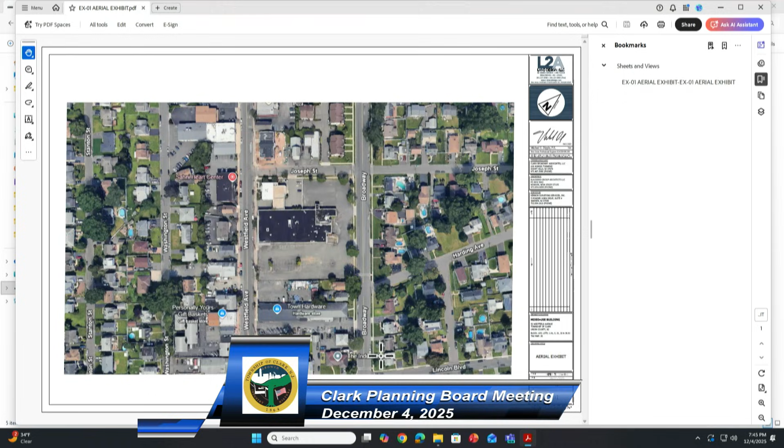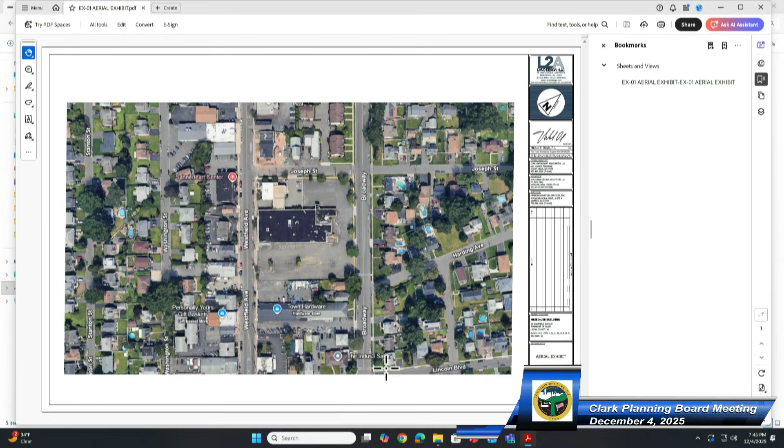To start off, I wanted to bring up a simple Google Earth aerial exhibit of the subject properties to get the board and the public familiar with the site as it exists today. This sheet shows the most current Google image, indicating the existing grocer on the central portion of the property in black, which has been vacant for nearly 20 years, surrounded by a large area of asphalt, the former parking areas. The site is accessed via Westfield Avenue to the south, Broadway to the north, and Joseph Street to the west. At the southwestern corner lies the existing bank with dual drive-through, with additional asphalt surfaces and a number of curb cuts. I wanted to familiarize the board with the site today prior to going into the plans, civil plans, and color renderings prepared for tonight's hearing.

A little additional information on the existing site: it slopes in a southerly direction, with Broadway at a higher elevation than Westfield. Stormwater runoff is not currently detained with any known stormwater management measures. Essentially, runoff from existing conditions flows off the site undetained, nearly all of it tributary to Westfield Avenue. There are 5 existing curb cuts throughout the entire property: 2 on Westfield Avenue, 1 on Joseph Street, and 2 on Broadway.

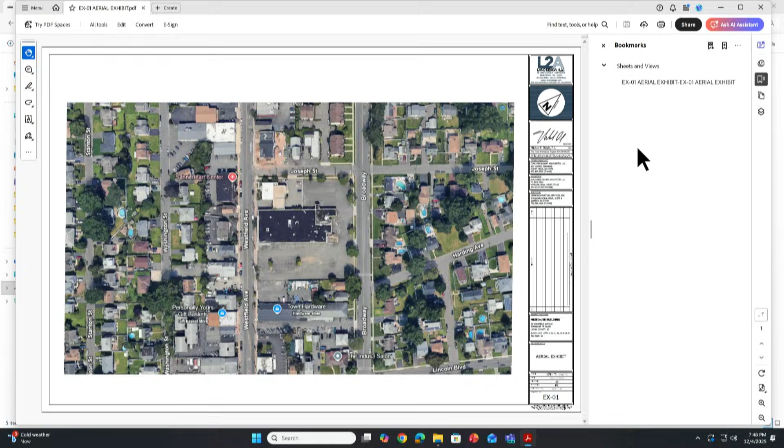I'm going to go right into the site plan that was prepared for this. We're marking this as an exhibit since it was not submitted to the board; this will be A2. Exhibit A2 is a near replica of sheet C04, the site plan submitted as part of this application. The major difference is that this plan is colorized to identify proposed improvements, including the building, grass or landscaped areas, new asphalt areas, curb cuts, and striping. There's one additional change resulting from the TRC meeting prior to this hearing, regarding curb radii. Some of the original curb radii for the driveways was 15 feet, and I changed it to a minimum of 20 feet to comply with those comments, before I forget going through the testimony of this plan.

The large brown area in the middle is the extent of the proposed building, a 3-story residential building over ground floor parking and commercial retail. The commercial retail component is at the southwest corner of the site, consisting of about 5,900 square feet. During architectural testimony we'll go over the interior workings of the building, but the ground floor parking can accommodate the required 1.7 spaces per unit. There are a total of 138 residential units on the upper 3 floors. The 236 parking spaces in the garage are accommodated through 77 tandem spaces and 82 single spaces, and we have additional testimony prepared during traffic testimony regarding parking and circulation.

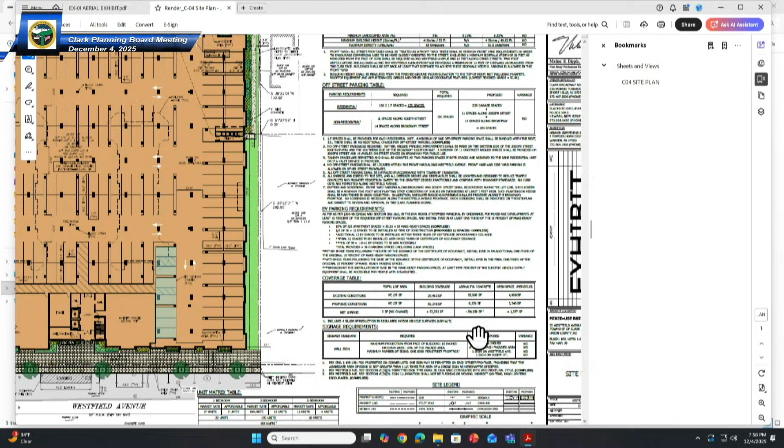So under proposed conditions, not only are we reducing the impervious coverage, the site decreases asphalt and concrete by about 54,159 square feet. It may seem like an insignificant number, but when it comes down to water quality, it's a significant improvement as compared to existing conditions.

Part of the stormwater management design was to show that the site does not increase runoff tributary to Westfield Avenue or Joseph Street, at the southwest corner of the site. It's not enough to just show that it doesn't increase stormwater. We implemented, per discussions with the engineer prior to finalizing the design, a series of stormwater detention tanks below the building. These tanks control runoff from the roof, which will be piped down the building columns into subsurface detention basins before going into the Westfield Avenue and Joseph Street municipal stormwater systems.

Why is that important? Because under current conditions, all of that runoff is uncontrolled during a large storm event, such as a 25 or 100-year storm, and those pipes are at or above capacity. So slowing the runoff underneath the building in these stormwater systems is a significant improvement, allowing runoff to leave the site slower, miss the peak, and improve the capacity of the downstream systems. That's one of the paramount design aspects, providing a significant quality and quantity improvement to the site as it currently exists.

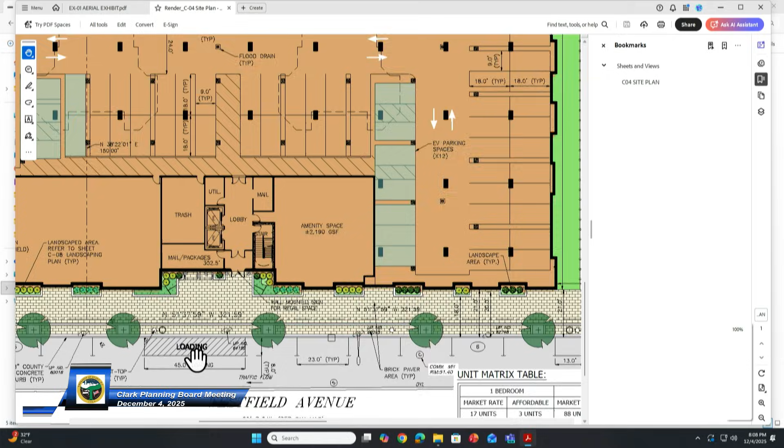Could you just show us where that loading would be? You can see the striped loading area, 45 feet long, along the frontage of Westfield. All right, thank you. Counselor, you? No, thank you, Mr. Mayor.

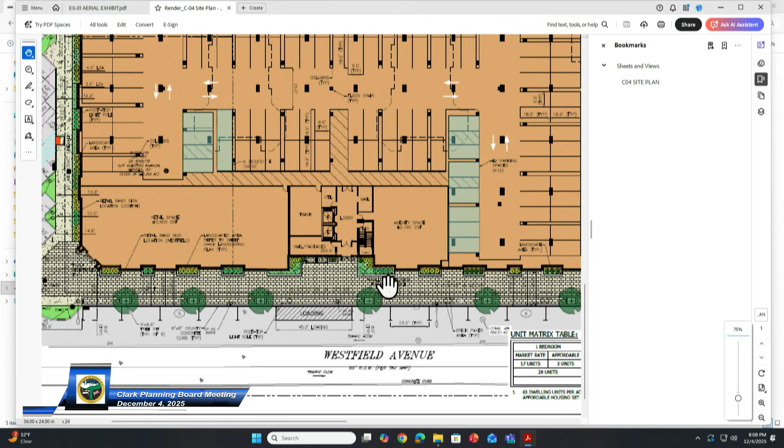Okay, hearing nobody on the board has any questions. If anyone from the public wishes to come forward regarding this testimony and this testimony only, you have a chance at the end of the meeting for general comments. Please come forward, state your name, spell it, and your address. Sure, Eric Rodriguez, 12 Bartel.

So I had a question regarding the lighting on Westfield Ave. Are the existing lights going to be retained, and are you going to add similar ones on the other sides of the property? So this question did come up. The PSE&G fixtures have actually been updated since these were installed. Even if I tried to save them, I don't think it's going to be possible. They would be replaced with the newest PSE&G fixtures and spaced between the street trees.

They would continue around the perimeter of the property to provide safe and adequate pedestrian passage throughout the site. And then the other question I had, the angled parking, is that taking over a portion of the street, or is that all on your property? The angled parking is not on our property. It's in the public right-of-way, but it does not encroach upon any existing facilities on Broadway.

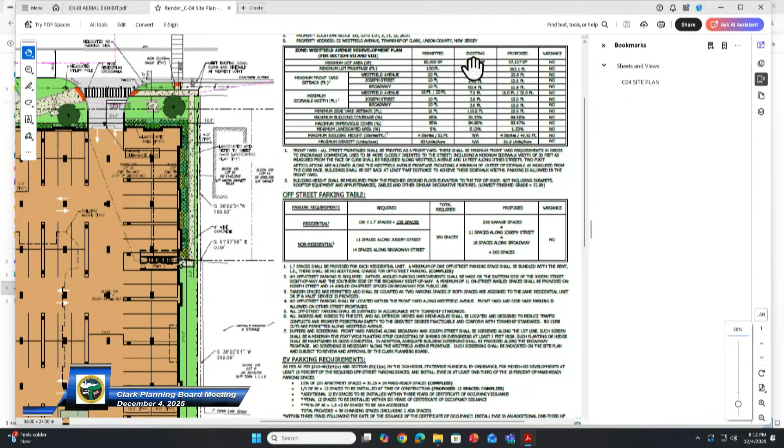So I'll zoom into the existing and proposed. The zoning table outlines the existing and proposed setbacks from Westfield, Joseph, and Broadway. Westfield existing 11.5, proposed 20.8. Joseph Street existing 24.2, proposed 12.6. Broadway existing 65.4, proposed 11.9. You can also see what the permitted redevelopment plan requirements are, so we are meeting the redevelopment plan requirements. Some may be closer, but some may be further away.

I'd also like it detailed, and you mentioned tree replacement. It looked like 9 trees. Again, how many, what's being removed, I guess, and what's the replacement of that?

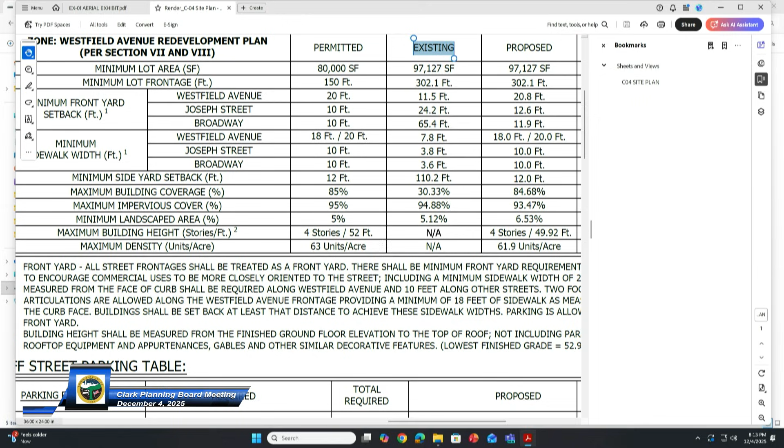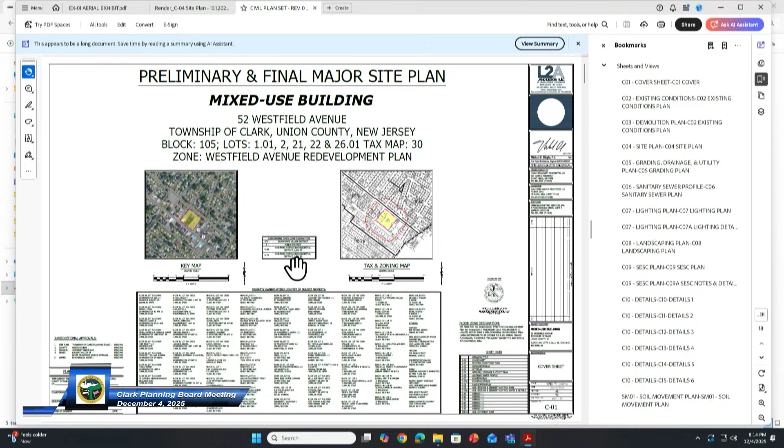We can go to the plans that were submitted as part of the application. So I'm bringing up the civil plans, do we mark the plans? You should mark it. And those are the landscaping plans?

So this is the demolition plan, and highlighted in blue X's are the existing trees being removed. A lot of the trees are actually within the public right-of-way and being replaced on site. I'll count approximately 11 trees that would be removed. As part of proposed conditions, we're proposing 19 new trees and 163 shrubs.

Hello, good evening. My name is Gabrielle Arruda. I live at 33C Parkway Drive. My question was also related to the trees.

I was wondering if the committee council might hold the business to the idea of having to supply non-invasive and native to New Jersey trees and shrubs. It's one thing to take down old growth trees and put up something inexpensive from a landscaper, as opposed to something invasive that will bring more pests to our community. So I would like to see that they're responsible for putting native trees and shrubs in, and perhaps also for the old growth trees they're taking down, perhaps you might make them plant additional trees elsewhere in Clark or within Union County. As Trevor mentioned, he talked about the trees as being aesthetic, and I think the trees are far more than aesthetic in our community, and we're losing a lot of them.

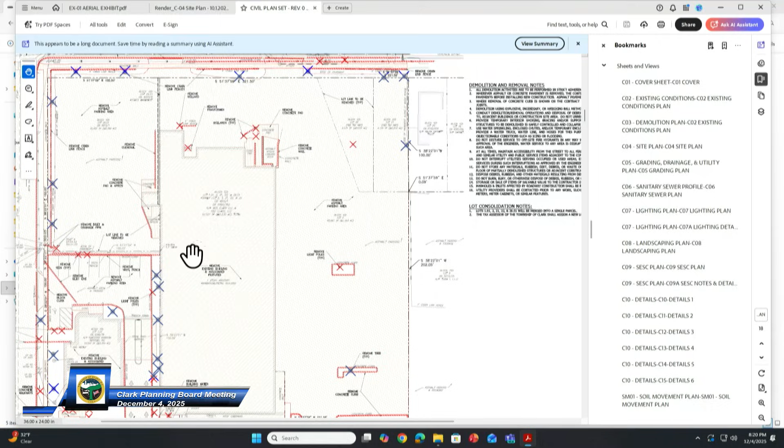All right, thank you. And so parking on Broadway, if you could go back to that drawing, if that's okay? So I'm changing back to the colorized site plan, A2. Thank you. So those spots on Broadway, you mentioned that you're not encroaching onto the current property today, so that means the blacktop that's there today, the asphalt, is all that remains to back up onto. Maybe this is for the traffic person, but I did want to talk about the clearance, and then I have another point for traffic and visual. So is there enough clearance, I guess is where I'm going.

So between the back of the angled space and the center line of the road is 18 feet, which is what's required for a backup maneuver of an angled space at 45 degrees, 60 degrees on Broadway. We do have a traffic engineer, after the architect, who will further elaborate. Just for your knowledge, which I haven't testified to, during the TRC meeting, comments came up about traffic on Broadway. So after the TRC, the traffic engineer and his team went out and did additional counts to ensure there are enough gaps to make turns onto Broadway and to facilitate testimony for the backup maneuvers for the cars.

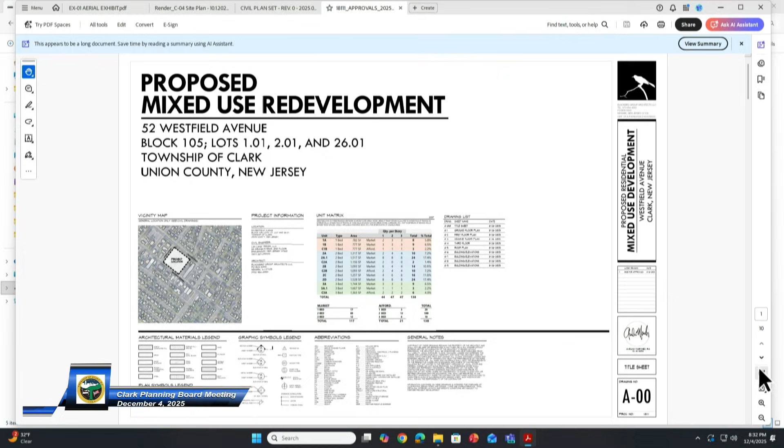As you heard, we spoke a little bit about the orientation of the building and the placement of the project. In terms of overall data, the building is a total of 138 dwelling units, broken up into 117 market rate units and 21 affordable housing units. The affordable units are broken down into 3 one-bedrooms, 12 two-bedrooms, and 6 three-bedrooms. The market rate units are 17 one-bedrooms, 88 two-bedrooms, and 12 three-bedrooms.

Referring to drawing A1 of Exhibit A4, the ground floor plan, this exhibit is very similar to the site plan we saw, where Westfield Avenue is located along the bottom of the sheet. We have Joseph Street on the left side and Broadway on the top of the page. Along the Westfield Avenue elevation, we have...

The residential pedestrian entrance would be at the center of the building, here at the bottom of the page. That would take someone to the elevators, mail room, package room, and some amenity space for tenants. To the left side, on the corner of Joseph and Westfield Avenue, we have a commercial retail space, approximately 5,900 square feet. There's no tenant selected at this time, and it's currently shown as one space, but it may be broken up into 2 smaller tenants depending on the final tenant selection. The primary or ceremonial entrance, which we'll see on the exterior elevations, is oriented towards the corner of Joseph and Westfield Avenue.

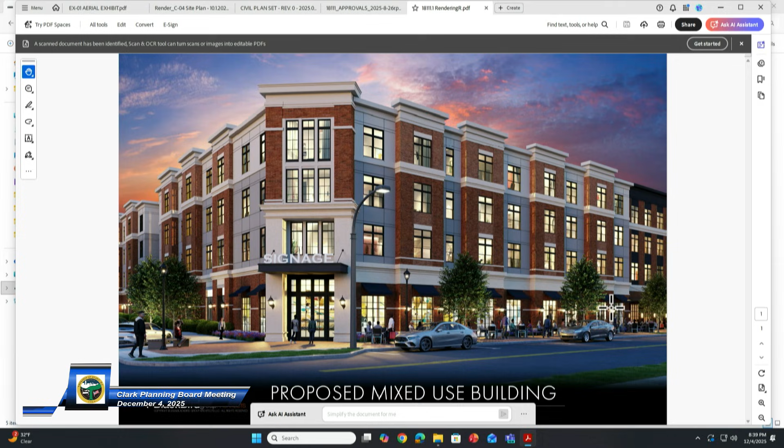In terms of the exterior design of the building, I'd like to refer to the rendering, a new exhibit which has not been submitted as part of the application. We'll mark this Exhibit A5, entitled 'A Proposed Mixed-Use Building,' prepared by my office and undated. That is an artist color rendering of the exterior view of the building as viewed from the corner of Joseph Street and Westfield Avenue.

As we saw on the plan, the element we have here would be the entrance to the retail or commercial space on the corner. As you can see, the building is a 3-story residential building over 1 story of commercial and parking on the first floor. In terms of exterior materials, what we try to do is break up the facade using a combination of vertical and horizontal demarcation.

By doing that, we can break up the facade and provide visual interest, using those demarcations as well as combinations of colors and materials and variations thereof. The light beige color you see here is a cast stone veneer. The remainder of the building uses a combination of brick in 2 coordinating shades - true masonry materials, full depth, real brick and real cast stone. In combination with that, we use fiber cement panels in 2 coordinating shades as well, giving us a very traditional and timeless architectural design with a base, a middle, and a top to break up that facade.

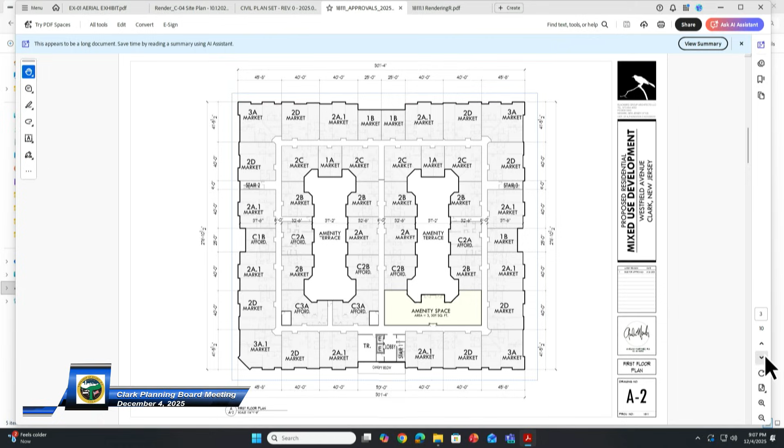Why don't you bring it up for her? Sure. So this is drawing A6. This here would be the front elevation, facing Westfield Avenue. If we go through the other pages, this would be along Broadway... no, I'm sorry, this would be the right side elevation. This would be the Broadway elevation, and this would be the Joseph Street elevation. You can't appreciate the colors on these images, but as you can see, it's all the same architectural features and materials.

And how close is the building to the actual curb of Broadway? The building itself? I would have to refer to the civil engineer's drawing. On Broadway, the proposed setback is 11.9 feet to the property line. The property line appears to be pretty close to the front of the parking spaces, so let's round that to 12 feet to the parking, from the building to that property line.

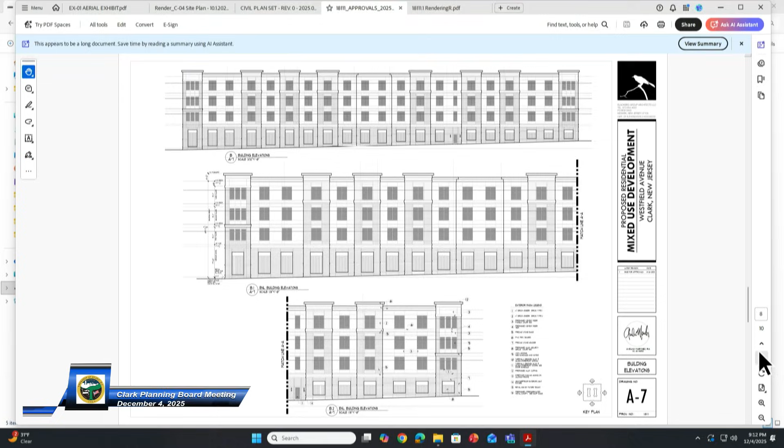Is 138 a set number of apartments, or can that be downsized? If you take away the parking spaces to the right and add retail, as Mr. Triola said, you could downsize some apartments and have enough spaces for smaller apartments, plus more retail on the ground floor. Is that a possibility? I'm not sure I can answer that as an architect. This is the project we have. I don't know that I'm the person to answer that. Just to add, even if we reduce those parking spaces, I don't think that would result in a reduction in units. Our traffic engineer will touch on the parking space issue.

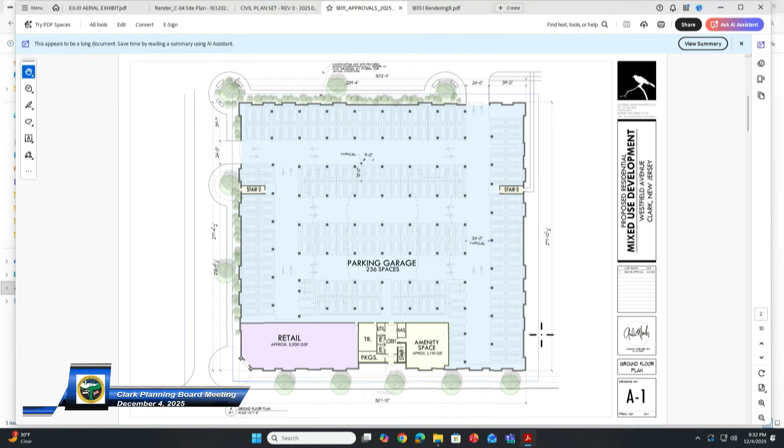Does that offer result in any waivers, deviations, or variances? No, if we take an EV credit or a partial EV credit - and we'll have our traffic engineer talk about that - but provided we take the EV credit, there would be no variances or design waivers. Do you agree with that, Mr. Ricky? We'll confirm, Mr. Troutman, but yes, I agree, and with my knowledge of this project, yes.

Thank you for taking the time to do that. Any other discussion on this matter? Hearing none, you can bring your next witness up. Thank you, I'll have our traffic engineer next.

Please raise your right hand and repeat after me. I, Nicholas Kennedy, solemnly swear that I will tell the truth, the whole truth, and nothing but the truth, so help me God.

Please state your full name, spell it, and your employer. Sure, it's Nicholas Kennedy. I'm a project manager at Stonefield Engineering and Design, located at 92 Park Avenue in Rutherford, New Jersey.

Mr. Kennedy, if you could just briefly state your education, experience, and licensure for the board. Absolutely. I'm a licensed professional engineer in the state of New Jersey, my license is current and in good standing. I hold a Bachelor of Science in Civil Engineering from the...

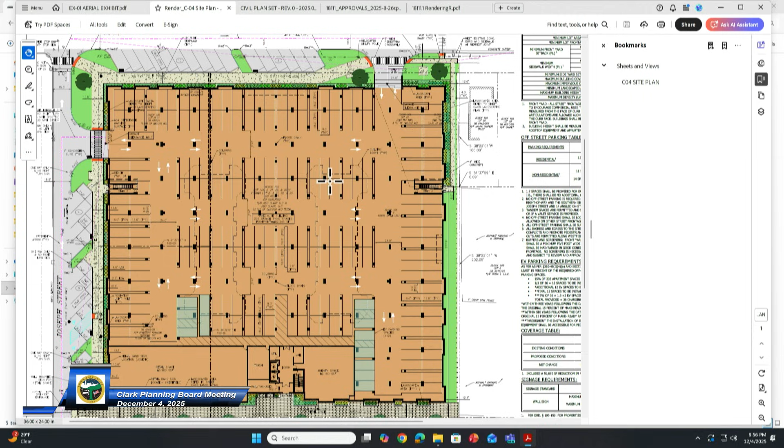Thank you. Okay, now, you mentioned the bump out on Broadway. Where is that going to exist? If I said Broadway, I misspoke. I meant Westfield, so I could show you real quick. Sorry. So the bump out is here, and that's really, as Trevor mentioned, pedestrian safety. It slows vehicles down from making this turn, and it generally just provides a wider and bigger pedestrian area at this corner. So it's really a safety mechanism.

Obviously, it also kind of blocks off where the parallel parking spaces on Westfield are. So there's only one bump out? I believe that's the only one. I believe so, yes.

Oh, I apologize. There is a bump out here too. You'll see that the landscape and the sidewalk goes up towards the end of those angled parking spaces and then down. So again, all for pedestrian measures in this area. And again, that was part of the redevelopment plan to enhance the safety for pedestrians in this area.

I'm not a fan of bump outs because on Lincoln Avenue, it's a mess. Let's see. I guess that's all I had right now. Thank you. Thank you.

Claire Labruno, 20 Post. My question was, you referenced several times saying the redevelopment plan required the angled parking on Joseph Street. Could you just clarify, because I'm not familiar, when you say that, are you talking about the town's redevelopment plan, or this project's specific redevelopment plan? It's not clear to me.

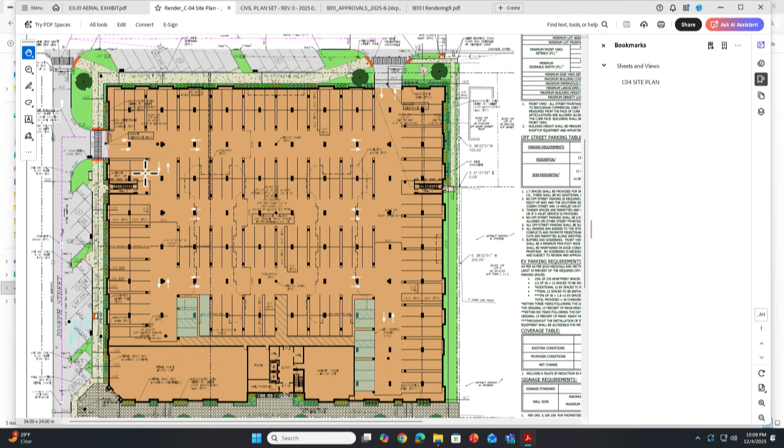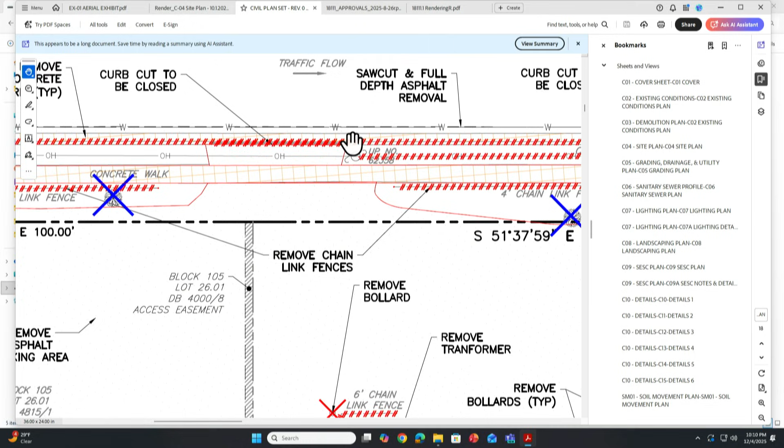John Orfoa, 40 Broadway. I guess you know it by now, but a couple things - I won't say that then. So I just want to point out, we are indeed cutting into the property. It's not the existing curb line that's there for the angled parking on Broadway, right? We're cutting in, right? Because that's existing right here where the green is, that's existing curb. Am I interpreting that correctly? Let me just flip back to the existing conditions plan. So the existing curb line is right here - oh sorry, that's the walkway. The existing curb line is here where this red line is. Now the proposed is actually in the same spot, and what we're doing is putting the parking in this area where you see grass, where the fingers are. You see the concrete walk, and there's some additional space between the property line and the sidewalk - that's where the angled parking spaces are going. The actual width of Broadway is not getting smaller, it's the same size, it'll be 18 feet wide.

Yeah, no, I get it. But so where the curb is today, where someone could technically park, we're not doing that, we're getting rid of that. Yeah, that's what we're cutting into the property. Correct. Which is fine, I was just clarifying.